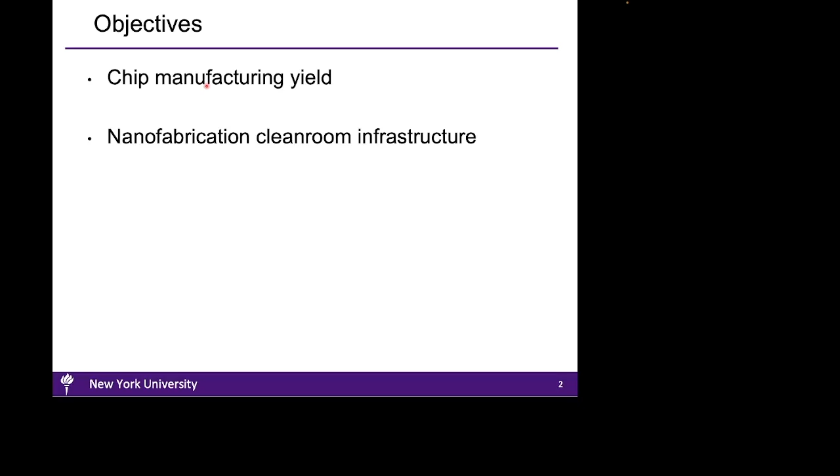In this video, we'll discuss the need for cleanroom infrastructures in chip manufacturing. In particular, this video will introduce the concept of manufacturing yield, as well as provide an overview of the nanofabrication cleanroom infrastructures.

In the previous video, we learned about the economics behind chip manufacturing. In particular, we discussed the efforts to increase the wafer size over time in order to integrate as many transistors as possible on a single wafer. Furthermore, we described that chip manufacturing involves replicating multiple copies of a microchip across a wafer. The main reason behind these considerations is to decrease the cost of electronics.

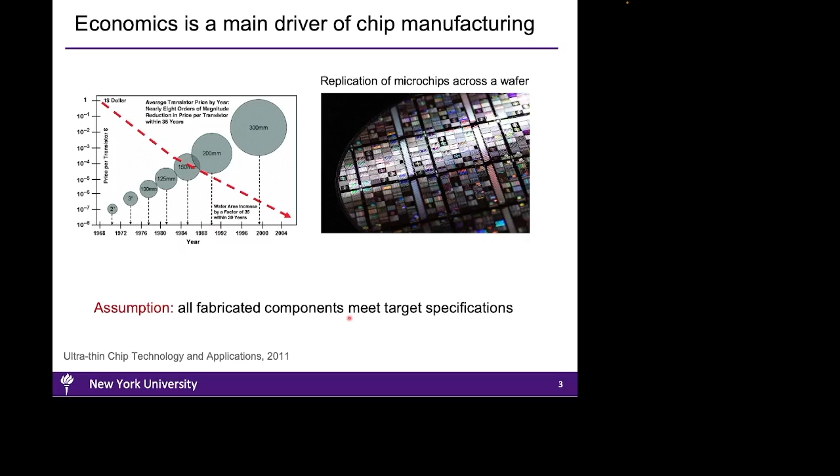However, a main assumption here is that all fabricated components meet the target specifications set out during the design. In practice, however, not all fabricated components on a single wafer would meet the target specifications. The illustration here shows an example of a wafer with multiple copies of a microchip. In this example, several microchip dies are incomplete because they are located at the corner of the wafer. These partial dies are denoted in yellow here.

In addition, there are microchip dies that are defective, which are indicated in red color in this illustration. As a result, only a subset of microchip dies will meet the target specifications, which are denoted as good dies in green color here. With this backdrop, the manufacturing yield is defined as the ratio of the number of good dies to the total number of full dies across a wafer. Since not all microchip dies are good, the cost of manufacturing can be retrieved only from the good dies. Therefore, increasing the manufacturing yield is an important factor for lowering the cost of electronics.

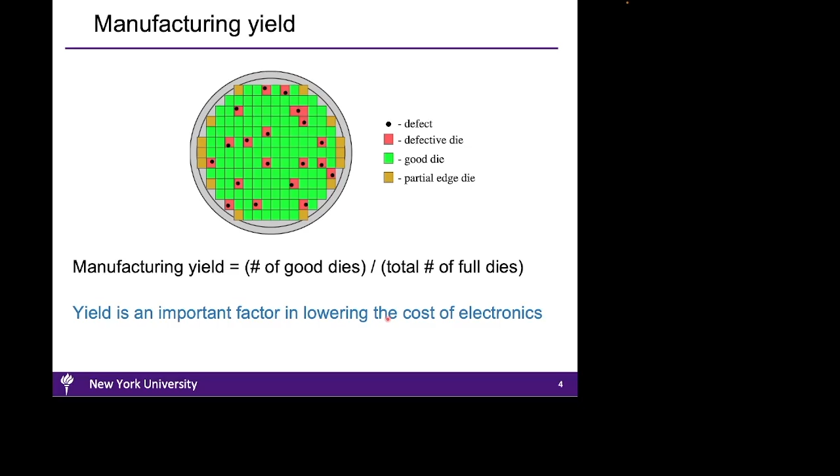Before we delve into the sources of killer defects, let us consider how the size of die impacts the yield. In this example, the wafer has 14 full dies. However, as the illustration shows, several killer defects coincide with 6 of the full dies on this wafer, thereby rendering them defective. As a result, there remain only 8 good dies on this wafer, which are marked with green color. With this information, we calculate the yield of this wafer to be 8/14, which is equal to 57%.

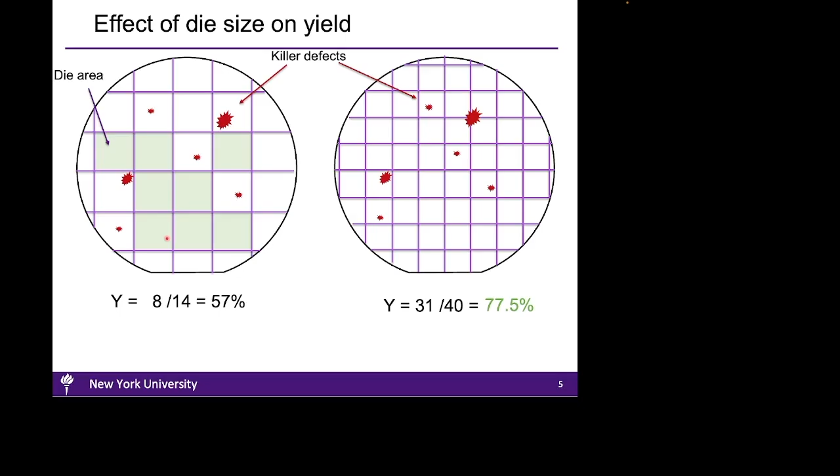Now let us consider another design where the microchip die is smaller than the previous design. As a result of this design change, we end up with 40 full dies on the same wafer size. In this example, we keep the characteristics of the killer defects in terms of shape, count, and location identical to the previous example. Similar to the procedure we used earlier, we count 31 good dies on this wafer. Now, using this information, we find the yield to be 31/40, which is equal to 77.5%. This example illustrates that microchips with larger die size are more vulnerable to the yield loss due to the killer defects.

Particles deposited on a wafer during fabrication are the main source of killer defects. Such particles may originate from many sources, including people, machines, chemicals, and human handling. These particles may be airborne or may be suspended in liquid or gases. The illustration on the left-hand side shows a few examples of contamination particles such as sodium, iron, gold, and copper particles, as well as photoresist residues.

These particles and contaminations may be generated during wafer handling or prior processing steps. Also, particles generated by humans, like hair, can be fatal in chip manufacturing. The image on the right-hand side shows the micrograph of a human hair, which is about 50 micron in diameter. The removal or significant reduction of particle sources is essential in chip manufacturing.

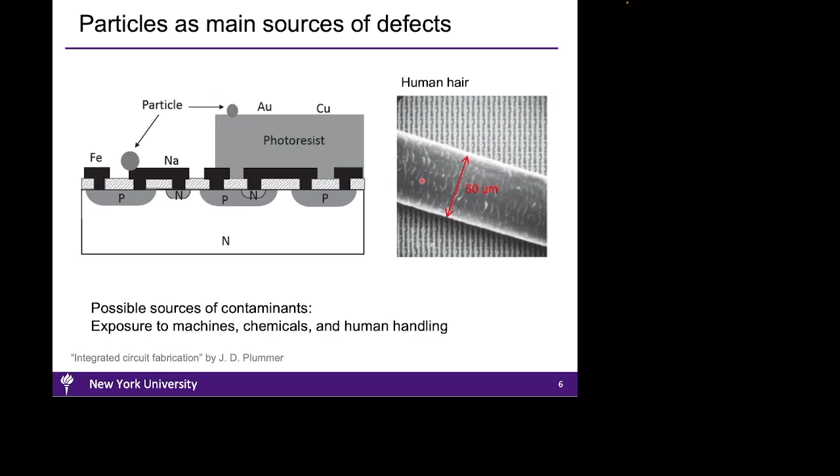Particles are always present in a distribution of sizes and shapes, as illustrated in this plot here. The airborne particles that are of concern in chip manufacturing plants range between about 10 nanometers to about 10 microns in size. In room air, particles smaller than 10 nanometers tend to coagulate with each other and form larger particle sizes. Those particles larger than 10 microns tend to be heavy and precipitate on surfaces.

Particles between 10 nanometers to 10 microns can remain suspended in air for long periods of time. Accordingly, these particles can cause significant yield loss in chip manufacturing. Therefore, removal of such small particles from the air is crucial for improving manufacturing yield. This is done through the construction of clean room environments.

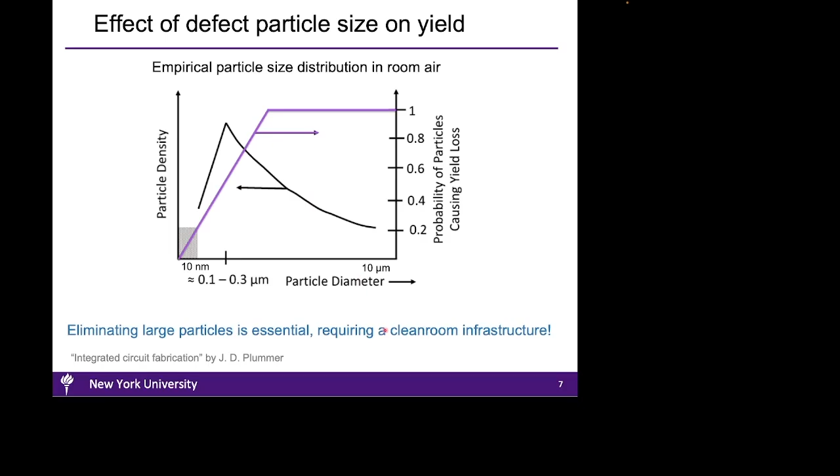The factories in which microchips are manufactured clearly must be clean facilities. Clean rooms provide the first level of defense against defects that affect yield. Clean rooms not only provide reduction in airborne particles, but also they provide tight control over temperature and humidity. Furthermore, different sections of a clean room may have different cleanliness ratings in terms of particle density depending on the needs of the fabrication process. This brings us to the question of how to quantify cleanliness.

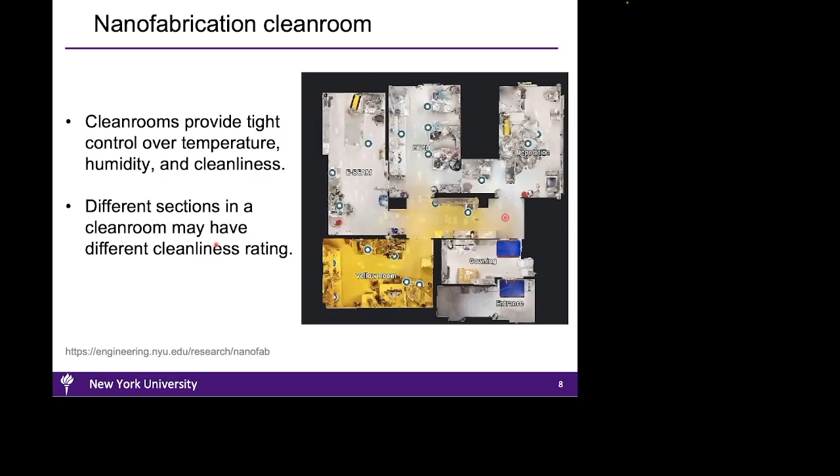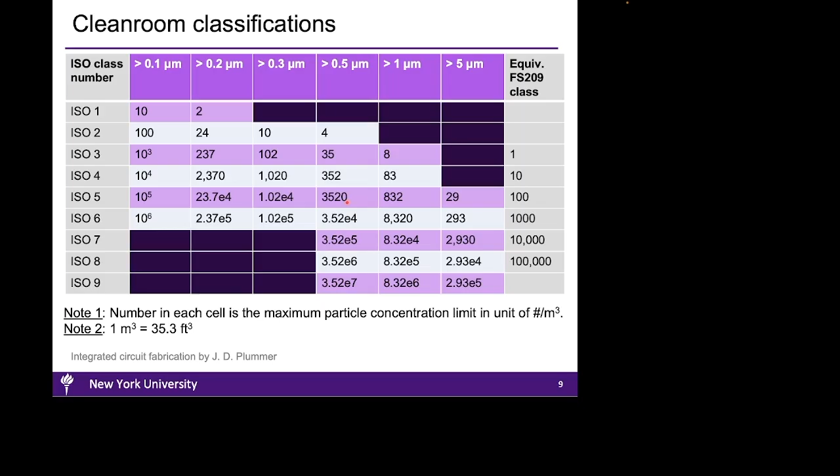Class X simply meant that in each cubic foot of air in the factory, there were less than X number of particles greater than 0.5 micron in size. For example, class 100 means that there are less than 100 particles of 0.5 micron in size per cubic foot, or the equivalent of 3520 particles per cubic meter. This class 100 clean room is the most typical clean room in academic environments. In contrast, the air in an advanced chip manufacturing plant is ISO 1 in most critical areas.

The cleanliness is achieved through a combination of air filtration, air circulation, clean room design, as well as careful elimination of particle sources. Since the sources of particles can never be eliminated, constant air filtration is used to remove particles as they are generated. This is achieved by recirculating the air through high efficiency particulate air or HEPA filters. The recirculated air is forced through these HEPA filters before it enters the clean room again. The HEPA filters are about 99.97% efficient at removing the particles from the air.

Note that the makeup air here replaces the air lost due to exhaust or during the air circulation. Lastly, in modern cleanroom environments, the process tools as well as pumps, vacuum pumps for example, are placed outside the cleanroom areas to minimize particles due to these machines.

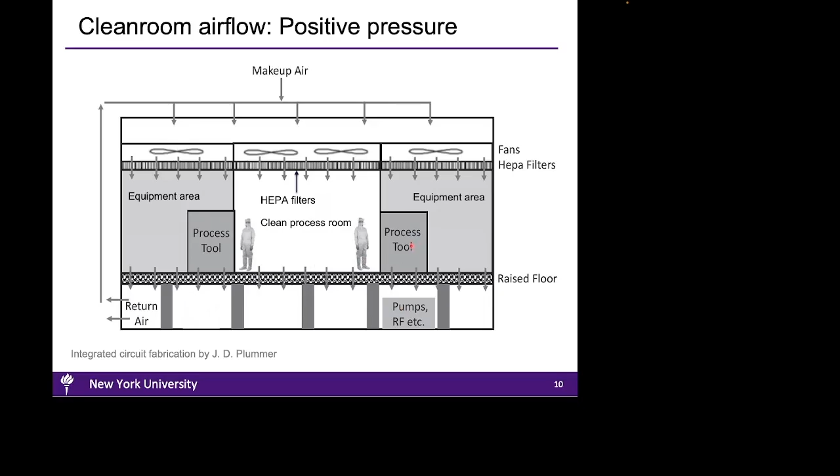As I noted earlier, people can generate particles due to exposure of their hair, skin, and clothing. In fact, a person in an idle mode, for example sitting on a chair, typically emits in the range of 5 to 10 million particles per minute. This number would increase to about 100 million particles per minute when a person is running. These particle numbers are huge. Therefore, a crucial consideration is to significantly reduce the particles emitted by people. This is accomplished through full coverage from head to toe by wearing bunny suits, face masks, as well as gloves.

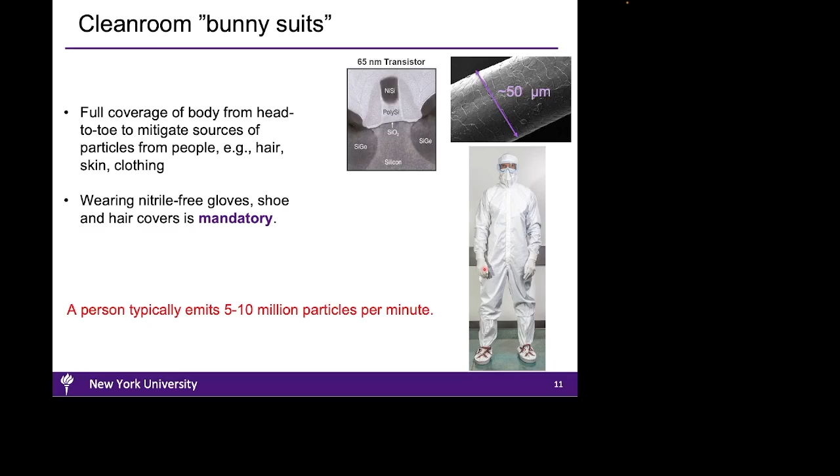In summary, in this video we learned that continuous filtering of particles in a clean room and wearing a proper clean room suit are essential considerations for improving the manufacturing yield of electronic chips.